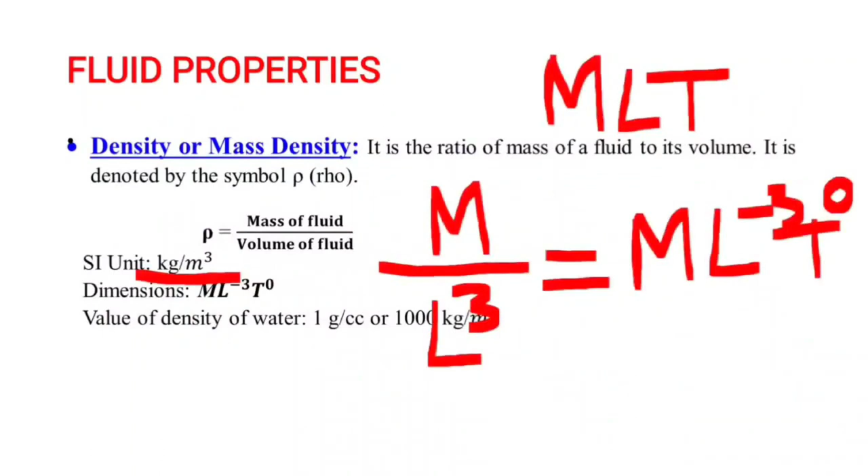So the dimensions for mass density are written as the unit kg per meter cube. Write in dimensions as M by L cube, that is equal to, in MLT form, M L power minus 3 T power 0. I hope it is understood how to write dimensions for mass density.

The value of density of water is 1 gram per cc or 1000 kg per meter cube. In numericals also, if the density of water is not given, you take 1 gram per cc or 1000 kg per meter cube.

The next fluid property is specific weight, also called weight density. It is the ratio of weight of fluid to its volume. It is denoted by the symbol gamma. Gamma equals weight of fluid by volume of fluid.

There is a relationship between weight density and mass density. Weight density equals mass density into acceleration due to gravity. If acceleration due to gravity is not given in the problem, it is 9.81 meters per second square.

SI unit for weight density is Newton per meter cube. SI unit is a derived quantity. In India, we have two systems of units - one is MKS unit, second one is CGS unit.

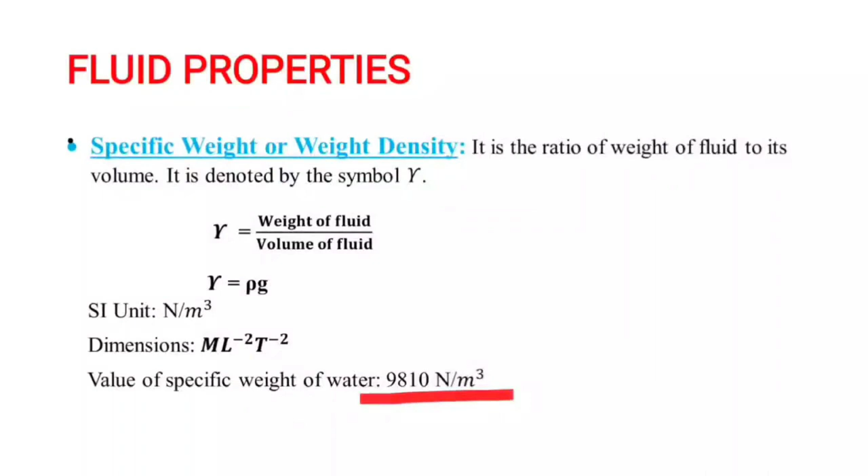The next fluid property is specific volume. It is defined as the ratio of volume of fluid to mass of a fluid. Another way of defining it is the volume of fluid occupied by a unit mass. Mathematically, specific volume equals volume of fluid by mass of fluid, which equals 1 by rho.

Specific volume is reciprocal to mass density. The unit for specific volume is a reciprocal. Rho has units of kg per meter cube, so the units for specific volume is meter cube per kg.

Dimensions: how to write and derive dimensions we saw for the two quantities, mass density and weight density. In the same manner you derive the dimensions for specific volume also. It is commonly applied for gases, not for liquids.

Specific gravity is defined as the ratio of weight density of a fluid to weight density of a standard fluid, or the ratio of density of fluid to density of standard fluid. It is also called relative density, and it is denoted by the symbol S.

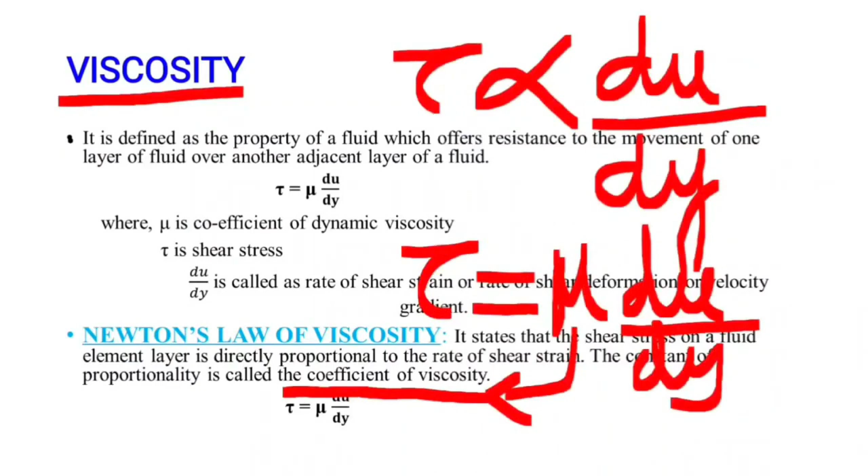Now, what are the terms? Tau is called shear stress. Du by dy is called the rate of shear strain, or rate of shear deformation, or velocity gradient. It has three names: rate of shear strain, rate of shear deformation, or velocity gradient.

The proportionality constant mu is there. Mu is called the coefficient of dynamic viscosity.

The next topic is units. See the definition of viscosity and Newton's law of viscosity. The units of viscosity, that is mu, equals tau by du by dy, which has units of Newton per meter square divided by velocity u, that is meter per second per meter. The meter gets cancelled, giving Newton second per meter square as the unit for dynamic viscosity.

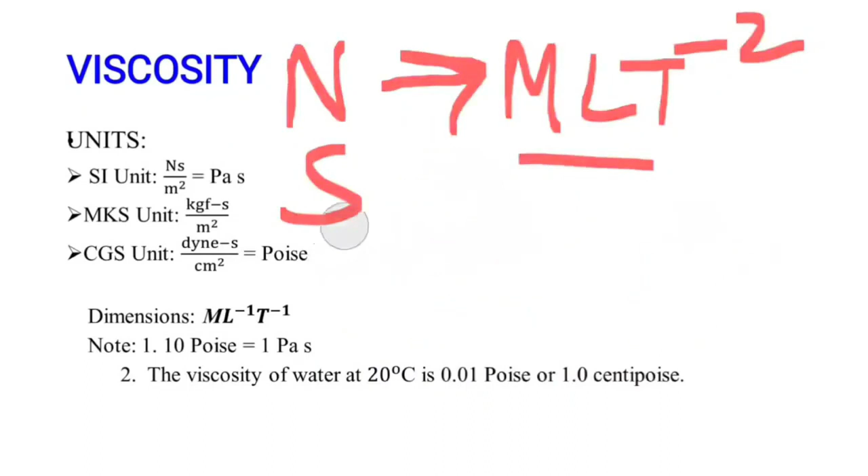It has dimensions. Newton has dimensions of MLT power minus 2. I know how to write dimensions in the previous two quantities, so I directly write the dimensions for the viscosity. N has dimensions of MLT power minus 2, S has dimensions of T, M square has dimensions of L square. So the dimensions are MLT power minus 2 into T divided by L square, that is equals to ML power minus 1 T power minus 1. It is the dimensions for viscosity.

Next one is note. That means you have to remember these points for your problems or in direct MCQs also. One poise is equals to 1 by 10 Pascal second. So 1 Pascal second is equals to 10 poise. The second point is viscosity of water at 20 degrees Celsius is 0.01 poise or 1 centipoise.

Next topic is kinematic viscosity. Kinematic viscosity is defined as the ratio between dynamic viscosity and density of fluid. Dynamic viscosity by density of fluid is called kinematic viscosity. It is denoted by the symbol nu. Mathematically, nu is equals to viscosity, that is dynamic viscosity by density of fluid. So nu is equals to mu by density, that is rho.

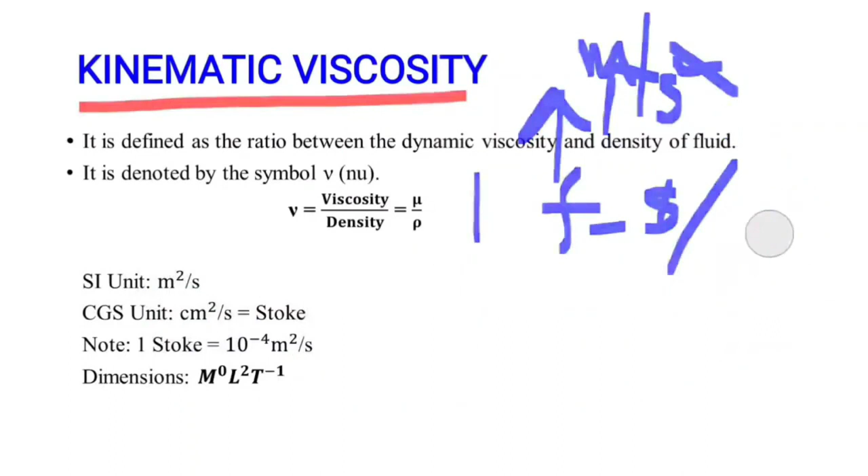The SI unit will be meter square per second. How it comes? Nu is equals to mu, Newton, that I write in SI unit as kg force second per meter square, divided by kg per meter cube. Kg get cancelled, meter square meter square get cancelled. F has units of meters per second square, so second get cancelled, that is meter square per second. This m goes here, that is meter square per second. I hope you understand. This is the SI unit or MKS unit.

The CGS unit will be centimeter square per second, that is Stoke. 1 Stoke is equal to 10 to the power of minus 4 meters square per second. Dimensions: meter square has dimensions L square, per second T power minus 1.

Next topic is variation of viscosity with temperature. Temperature affects the viscosity. Viscous forces in fluid are due to cohesive forces and molecular momentum transfer. What is meant by cohesive force? Cohesive force refers to the force of attraction between the same particles. For example, Hg, mercury. Mercury has the same molecules, has more force of attraction between them, that is cohesion. So in mercury, cohesion is more than adhesion. Adhesive forces refer to the force of attraction between two different substances, that is water and paper.

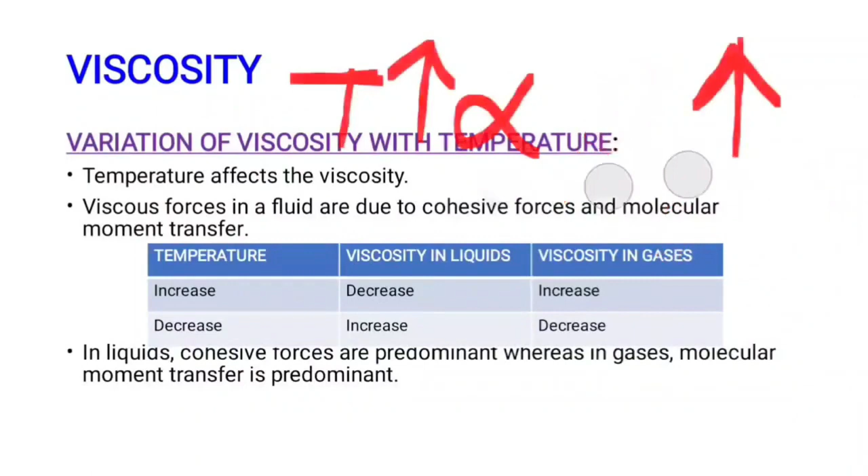The next topic is types of fluids. Ideal fluid: when is a fluid called ideal? It is incompressible and having no viscosity. No viscous means frictionless. It does not exist in real life, these are imaginary fluids. Real fluids possess viscosity, they have viscosity. All fluids in practice are called real fluids only.

Newtonian fluids: a fluid that obeys Newton's law of viscosity is called Newtonian fluid. One that does not obey Newton's law of viscosity is called non-Newtonian fluid. In other words, the same thing is discussed here: when tau is proportional to rate of shear strain, it is called Newtonian fluid. If it is not proportional, it is called non-Newtonian fluid.

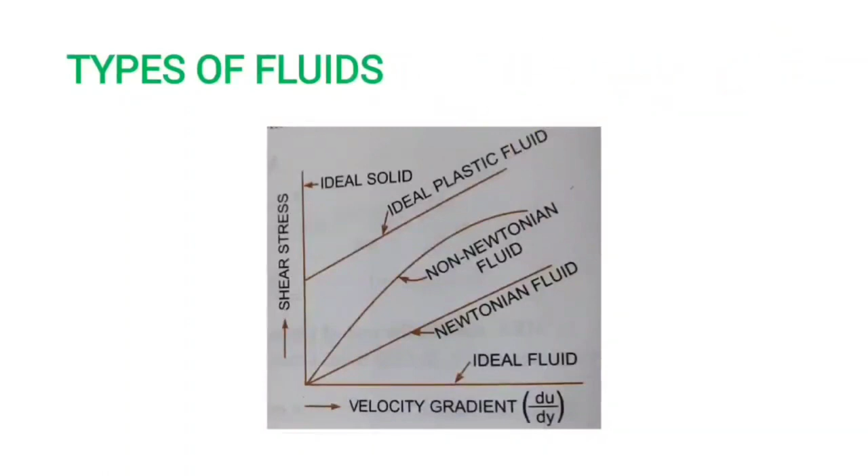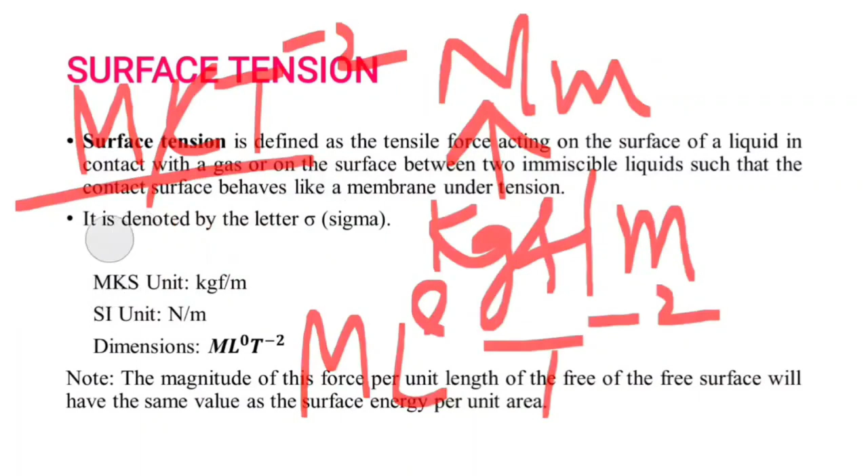Surface tension on a liquid droplet: P refers to pressure intensity inside the droplet, sigma is surface tension, D is the diameter of the droplet. P is equal to 4 sigma by D. How do we get it? By equating pressure force with the force due to surface tension. Please remember these formulas for your problems and numericals to solve.

Surface tension on a hollow bubble, like a soap bubble: both outside and inside it is in contact with air. What does the surface tension definition say? Water or air - contact between water and air, which are two immiscible liquids - forms a thin layer due to tension. So it is two times the surface tension compared to the droplet.

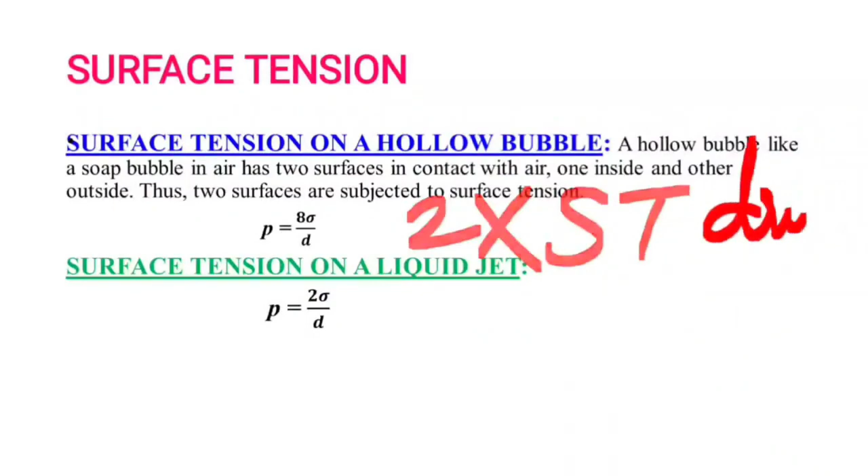Surface tension on a liquid jet: P is equal to 2 sigma by D. It is like a bar - this is L, this is D.

The next topic is capillarity. Capillarity is defined as the phenomenon of rise or fall of a liquid surface in a small tube relative to the adjacent general level of liquid when the tube is held vertically in the liquid. For example, liquid is present, and a capillary tube is inserted vertically. If the water rises in the capillary tube, it is called capillary rise. If the water held vertically in the tank, the fluid in the capillary tube falls, it is called capillary depression or capillary fall. It is expressed in terms of centimeter or millimeter of liquid. Dimensions are L only, so m power 0, L power 1.

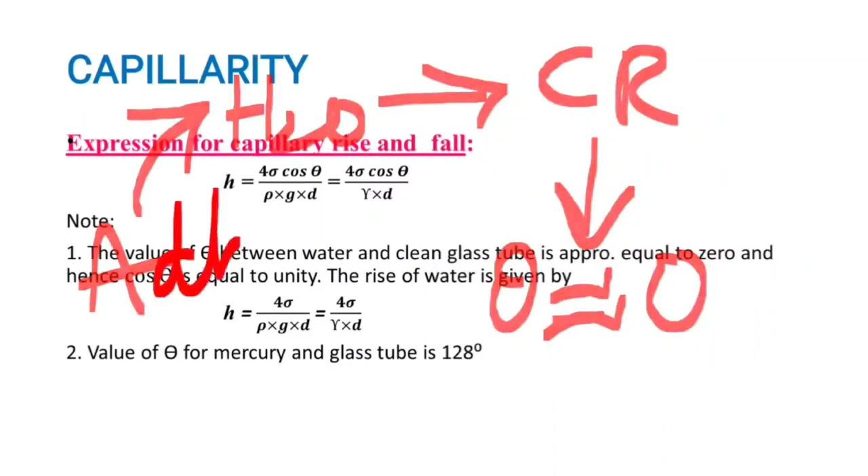Water has more adhesion. Okay, where in case of mercury...

Hg, mercury in a capillary tube, has more cohesion, so theta will be approximately 130 degrees.

This is capillary depression or capillary fall.

The next topic is vapor pressure. Consider a liquid confined in a closed vessel. Take this as a vessel. Let's say this is a vessel, closed. It is closed.

Water is present in this closed vessel. Initially the temperature is 20 degrees Celsius and the pressure is atmospheric pressure. As it is heated up, the liquid will vaporize at 100 degrees Celsius.

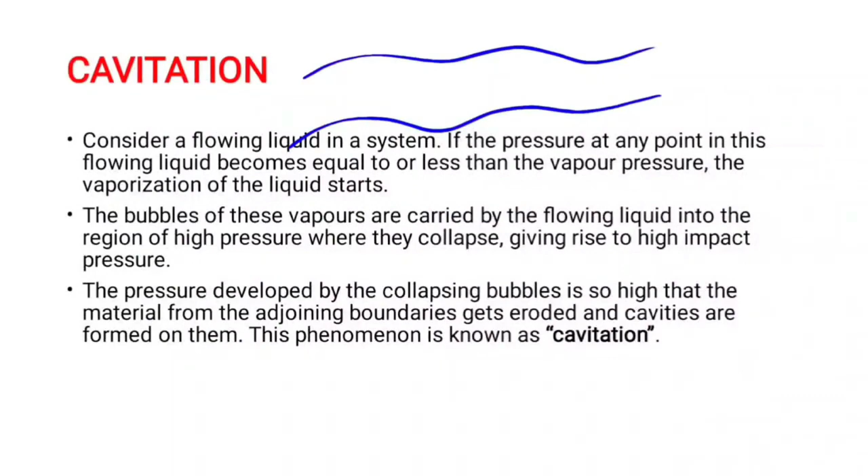Here the pressure is less than or equal to vapor pressure. The bubbles of these vapors are carried by the flowing liquid into the region of high pressure where they collapse, giving rise to high impact pressure. The pressure developed by the collapsing bubbles is so high that material from the adjoining boundaries gets eroded and cavities are formed on them. This phenomenon is known as cavitation.

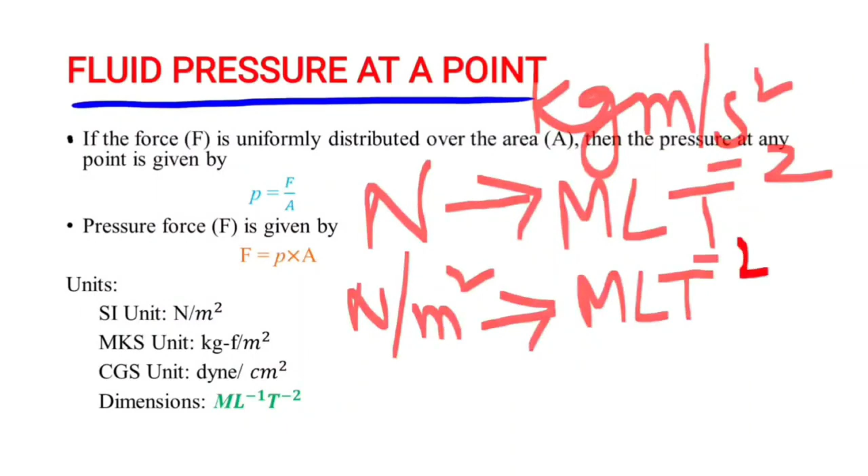The pressure has units of Newton per meter square, so ML T power minus 2 divided by L square, that is ML power minus 1 T power minus 2, is the dimension of pressure.

Next is Pascal's law. Pascal's law states that pressure at a point in a static fluid, meaning the fluid is at rest condition, is equal in all directions - in x direction, in y direction, in z direction, the pressure is equal: Px equals Py equals Pz. That is Pascal's law.

The next one is hydrostatic law. The pressure at any point in a fluid at rest is obtained by the hydrostatic law. It states that the rate of increase of pressure in a vertically downward direction must be equal to the specific weight of the fluid at that point.

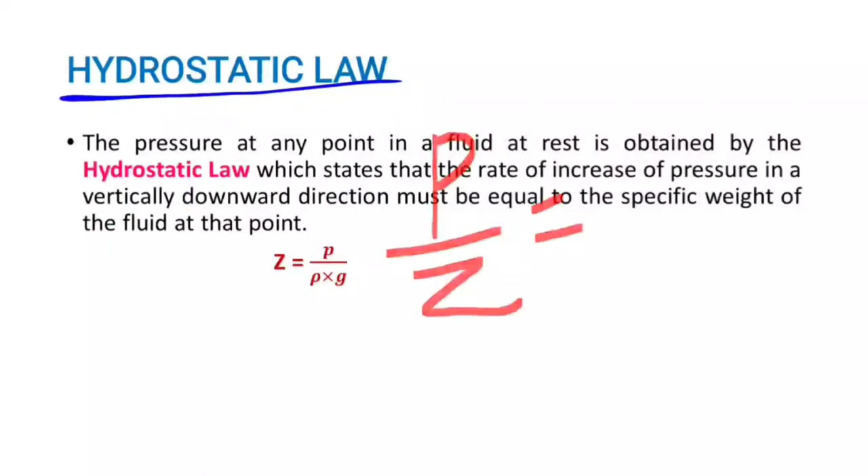dP by dz is equals to gamma. Gamma is equals to rho g. If you integrate this, dP becomes P and dz becomes z, that is equals to rho g. So P by z is equals to rho g, and z is equals to P by rho g. This z is called pressure head.

Pressure head. The next topic is absolute, gauge, atmospheric and vacuum pressure. How are these defined? We have two systems: in one, absolute zero or completely vacuum pressure is taken as datum; in another, atmospheric pressure is taken as datum.

Absolute pressure: here we take absolute vacuum pressure as reference and calculate the pressure, which is called absolute pressure. Gauge pressure: here we take atmospheric pressure as datum and measure pressure, which is called gauge pressure.

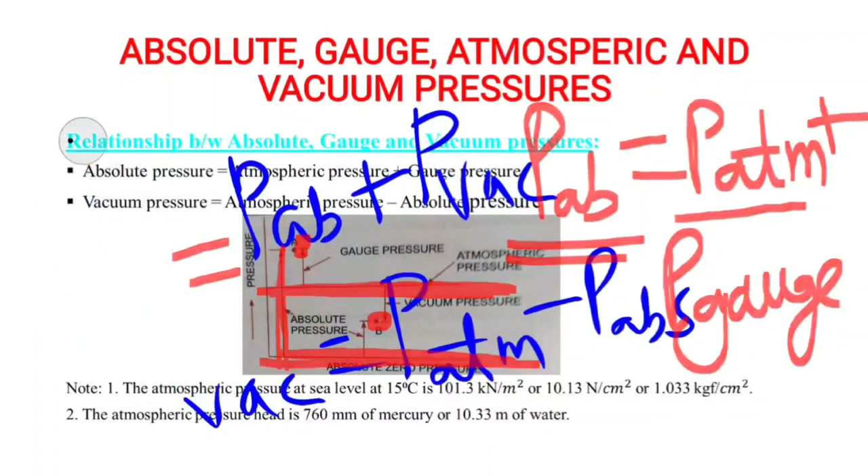Some important points to remember: first, atmospheric pressure at sea level at 15 degrees centigrade is 101.3 kilonewton per meter square, 10.13 newton per centimeter square, or 1.033 kgf per centimeter square. Generally this value of 1 atmospheric is equals to 1 atm.

What is atmospheric pressure equal to? 101325 Pascal, that is Newton per meter square. This Pascal is converted into kilonewton per meter square, Newton per centimeter square, and kgf per centimeter square. This is the first point.

Second point: atmospheric pressure head in terms of mercury is 760 mm, and in terms of water is 10.33 meters. The next topic is measurement of pressure.

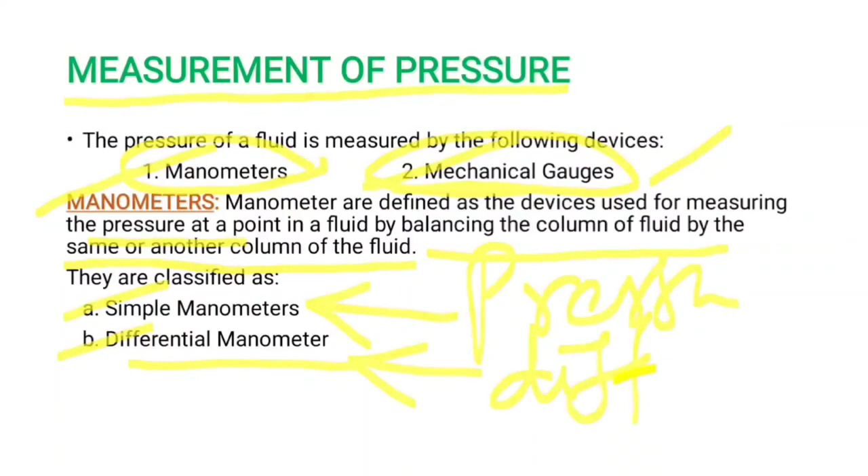Simple manometers consist of a glass tube. One end is connected to a point where pressure is to be measured. I need to measure pressure at this point, so I connect a glass tube to that point, and the remaining end is open to atmosphere. This is a simple diagram for that.

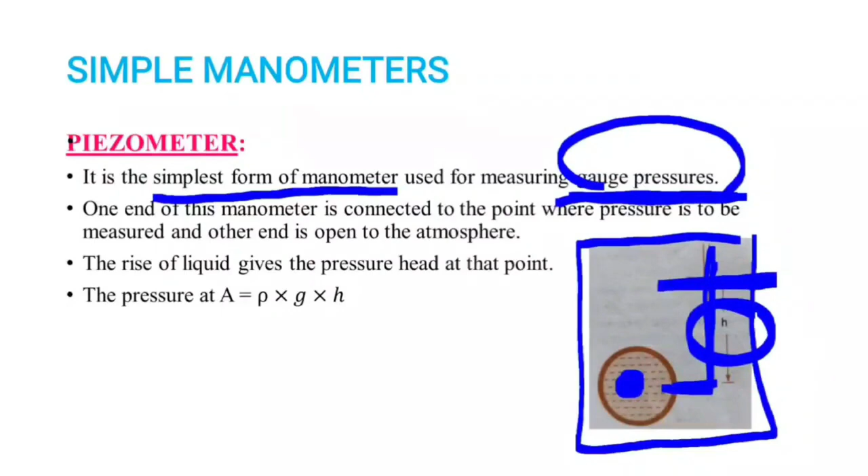Z is equals to P by rho g. So P is equals to rho g z. Here z becomes h, so the formula becomes rho g into h.

The next one is U-tube manometer. It consists of a glass tube bent in U shape.

One end of the tube is connected to a point at which pressure is to be measured, and the other end is kept open to the atmosphere.

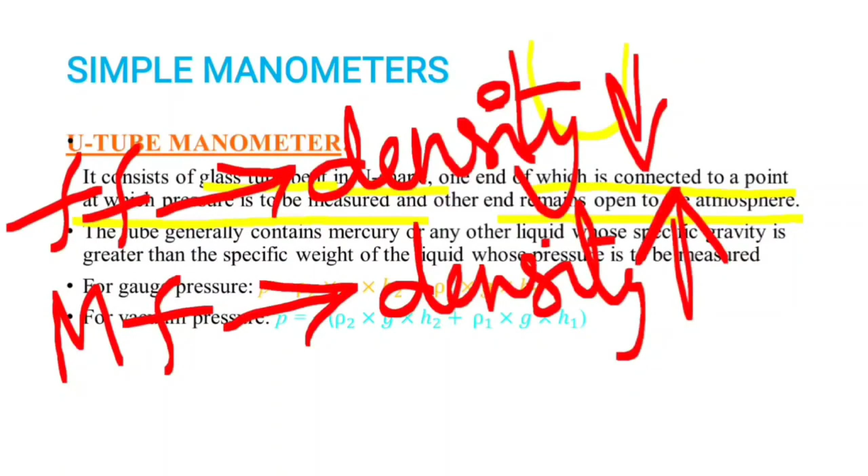Here we find gauge pressures as well as vacuum pressures. This represents atmospheric pressure. Based on this atmospheric pressure as datum, I use it to measure vacuum pressure (P vacuum) in the downward direction, and in the upward direction it is called P gauge.

These figures represent: the first one is for gauge pressure, the second one is for vacuum pressure. The flowing fluid, like water or oil, is at this position, and this is for the manometric fluid. I take this line AA as the datum.

How to measure pressure in U-tube manometer? First let us see how to find the equation for gauge pressure. H1 is the height of flowing fluid, and H2 is the height of manometric fluid, based on the datum line.

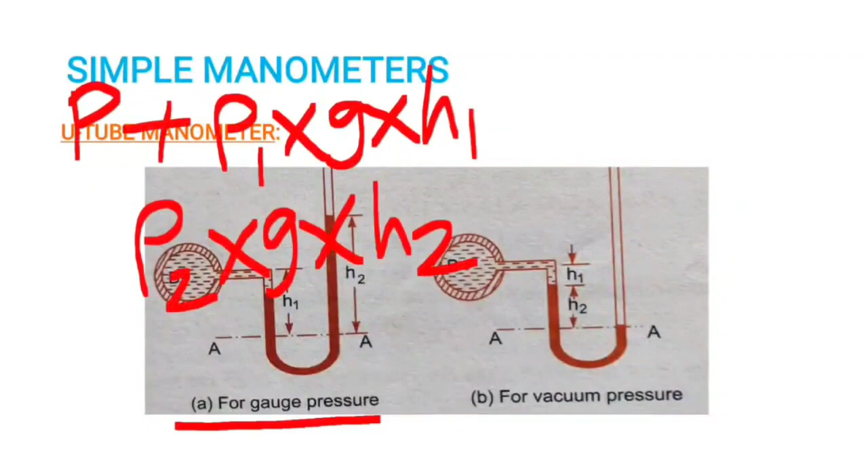So taking rho2*G*H2, P equals rho2*G*H2 minus rho1*G*H1. Simple. I hope this is understood by everyone.

Next, how to find pressure for the vacuum pressure case. Let's see how to find this. In the vacuum pressure case, the flowing fluid height is less, and the manometric fluid height here is more.

Consider line AA as datum. Here atmospheric pressure is 0. On the right side it is 0, on the left side we have P, so P plus H1 for the height of flowing fluid gives rho1*G*H1, plus rho2*G*H2. Equating left side to right side which is 0, P equals minus of rho1*G*H1 plus rho2*G*H2. This is the equation for vacuum pressure in the case of U-tube manometer.

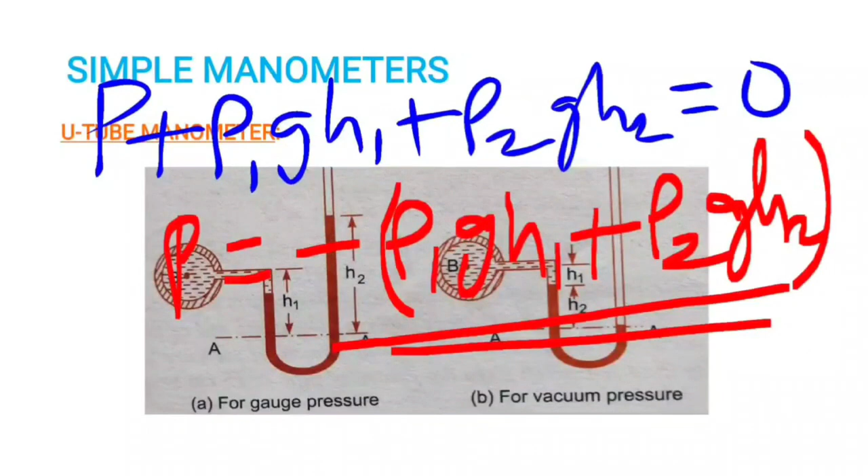The next one is differential manometer. Differential manometers are devices used for measuring the difference of pressures between two points or in two different pipes. Here we find out the difference of pressure. A differential manometer consists of a U-tube containing a heavy liquid, whose two ends are connected to the points whose difference of pressure is to be measured.

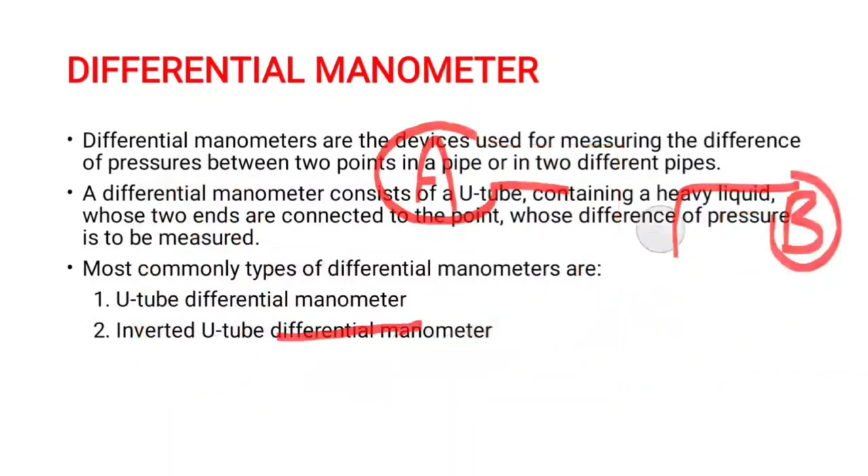U-tube differential manometer has two cases. First, A and B are at different levels and contain different liquids, also containing liquid of different specific gravity. In differential manometers, what you have to find is the difference in pressures, PA minus PB. Let me show you how this equation is derived.

First I take the left hand limb - this part is the reference. Here pressure at A is PA, so PA plus this height x plus h, gives rho1*g*x plus rho1*g*h. This is the left hand side. The right hand side will be PB plus...

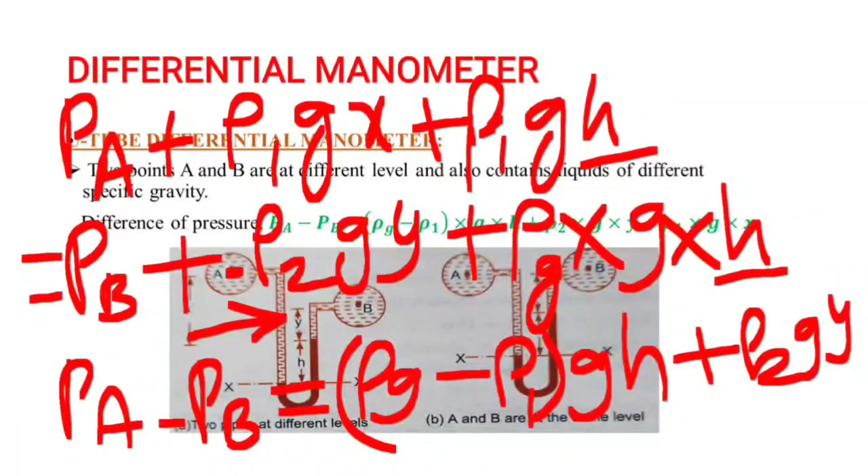...rho2*g*y plus rho_g (heavy fluid density) into g into h. Equating these two, PA minus PB equals, since gh is common in this term, (rho_g minus rho1)*g*h plus rho2*g*y minus rho1*g*x. This is the equation - you can see it here.

Here, PA minus PB is equal to rho g minus rho 1 times g into h, plus rho 2 into g into y, minus rho 1 into g into x.

The next case is two points A and B at the same level, containing the same liquid, that is, the density is same. We find the difference in pressure. This is the second case, and this is the second case diagram. Take this as reference.

So PA plus... A plus x plus h, right? So rho 1 g x plus rho 1 g h, this is the left hand limb. And the right hand limb is PB plus rho 1 g x plus rho g h. Equating these two, terms are cancelled, and PA minus PB is equal to rho g minus rho 1 into g into h. This is the equation we got.

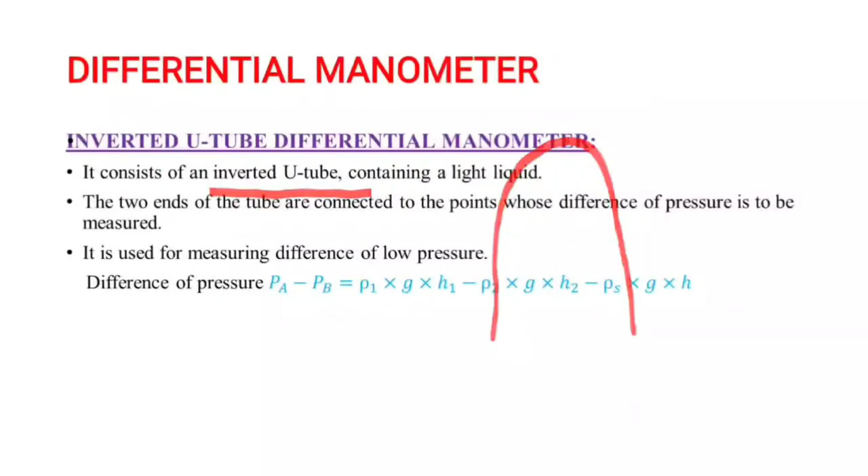The next is inverted U-tube differential manometer. It consists of an inverted U-tube containing a light liquid. Light liquid means the manometric fluid is lighter than the flowing fluid. The two ends of the tube are connected to a point whose difference of pressure is to be measured. It is used for measuring difference of low pressure.

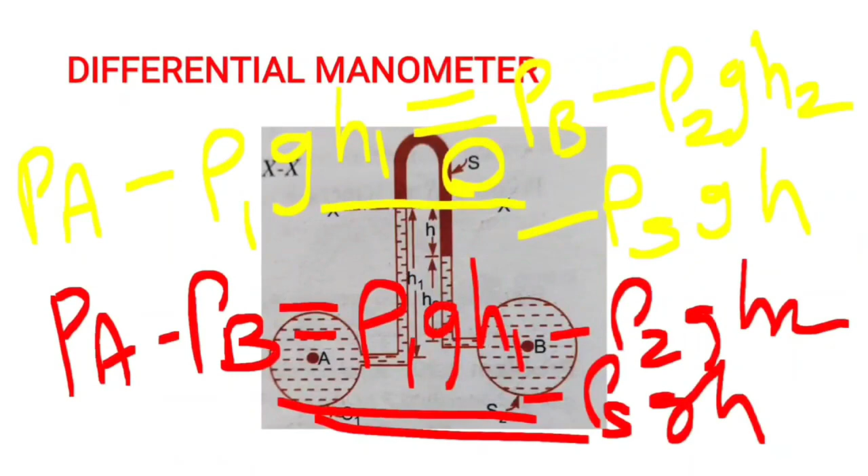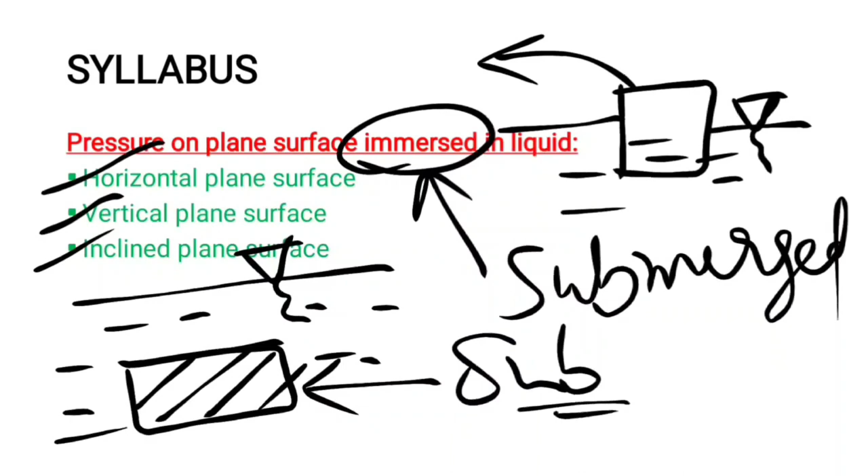First we will see what total pressure is, and what center of pressure is. It is defined as, total pressure is defined as a force — it's a force, not pressure. Total pressure is a force exerted by a static fluid, meaning the fluid is at rest, on a surface, either plane or curved, when the fluid comes in contact with the surface. This is the surface of the liquid, this is liquid, this is liquid.

A vertically submerged body — I take a vertical plane surface submerged in liquid. The water comes in contact with the surface, and a force is exerted on the surface. That force acts normal to the surface. This is the surface, the force acts normal to the surface. This is pressure force, acting normal to the surface. The point of application of the total pressure force on the surface is called the center of pressure.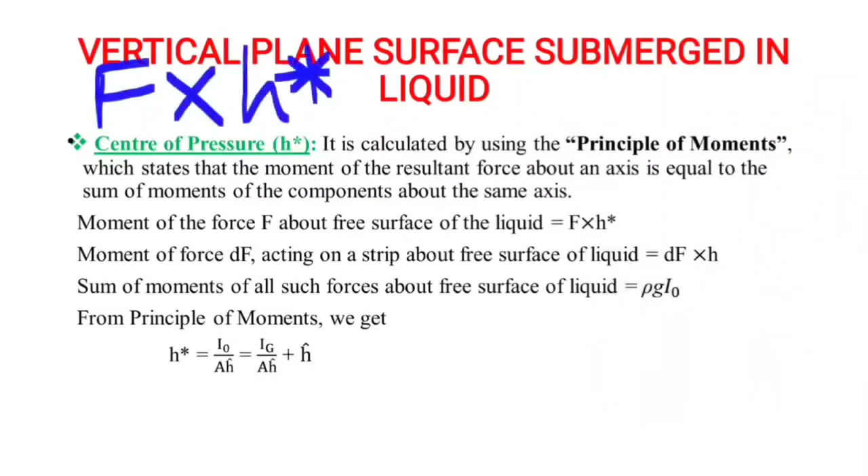So the moment due to resultant force will be F into H star, for this strip, dF into H. I integrate all and sum, I get rho g I naught.

From this, H star is equal to rho g I naught divided by F. F is nothing but rho g A H bar. Rho g gets cancelled, so H star is equal to I naught by A H bar.

From the parallel axis theorem, I naught is equal to Ig plus A H bar squared. Substitute I naught in this equation, we get H star is equal to Ig by A H bar plus H bar.

This is the equation for center of pressure distance.

The next point to remember is that the center of pressure lies below the center of gravity of the vertical surface. This is the center of gravity, and this is the center of pressure. H star is equal to Ig by A H bar plus H bar. H star equals H bar plus, this is the free surface, this is H bar, this is plus Ig by AH, this distance. So Cp is below the Cg, center of pressure is below the center of gravity.

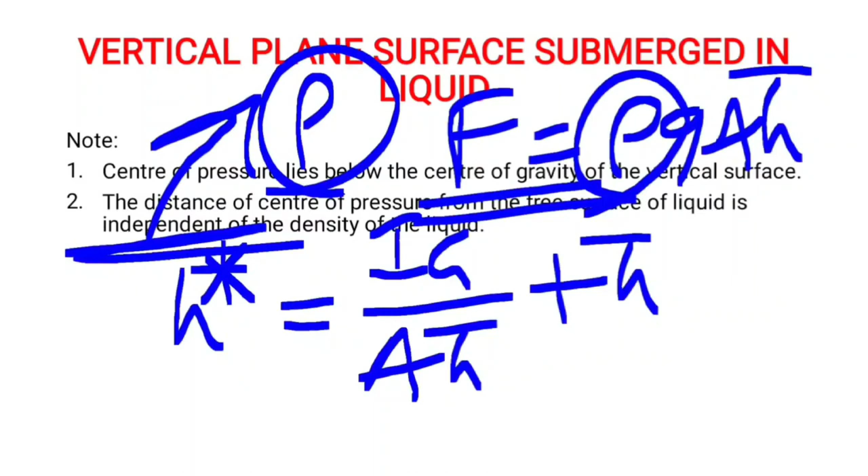The equation is Ig by A H bar plus H bar. In this term, we don't have rho, so it is independent of density. But the pressure force is rho g A H bar, so F is dependent on the density of the liquid.

The next one is to give some important plane surfaces - rectangle, triangle, circle, trapezoid - and their moment of inertia, that means MI.

First, rectangle: CG from the base is d by 2, area is BD, moment of inertia about center of gravity or centroid is BD cube by 12, and from the base it is BD cube by 3.

For triangle, CG from the base is x equal to h by 3, and the area is half into BH. The moment of inertia will be BH cube by 36, and about the base it is BH cube by 12.

Next, the plane surface is circle. It has CG from the base at d by 2, the area is pi by 4 d square, and the moment of inertia about the centroid is pi d power 4 by 64.

For the trapezium, x is equal to 2a plus b by a plus b into h by 3, where a is top width and b is bottom width of the trapezium. This is the centroidal distance from the base. Area is a plus b by 2 into h, and the moment of inertia is a square plus 4ab plus b square by 36 into a plus b into h cube, about the centroid.

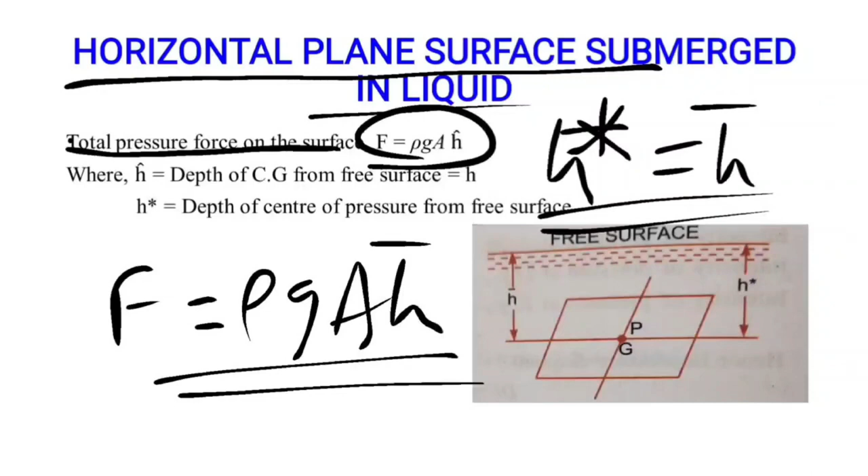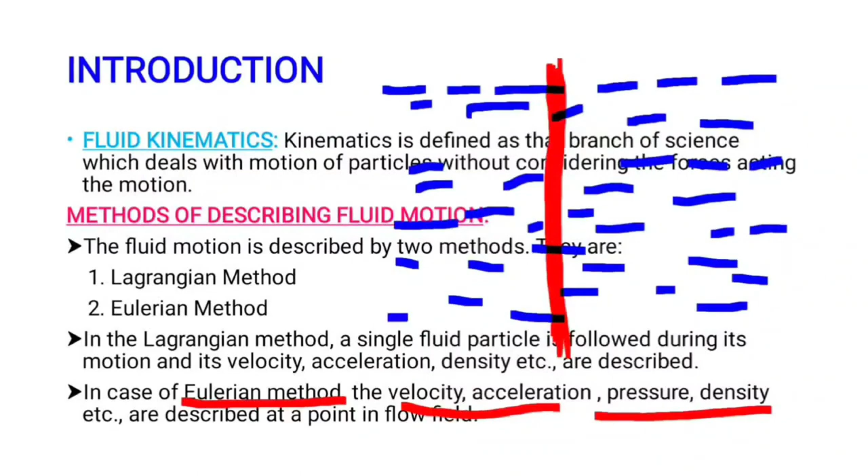Next, fluid flow is classified as follows: steady and unsteady flows, uniform and non-uniform flows, laminar and turbulent flows, compressible and incompressible flows, rotational and irrotational flows, and 1, 2 and 3 dimensional flows. In our syllabus, the first three flows - steady and unsteady, uniform and non-uniform, laminar and turbulent flow - are included. Compressible, incompressible, rotational, irrotational, and 1, 2, 3 dimensional flows are not in our syllabus.

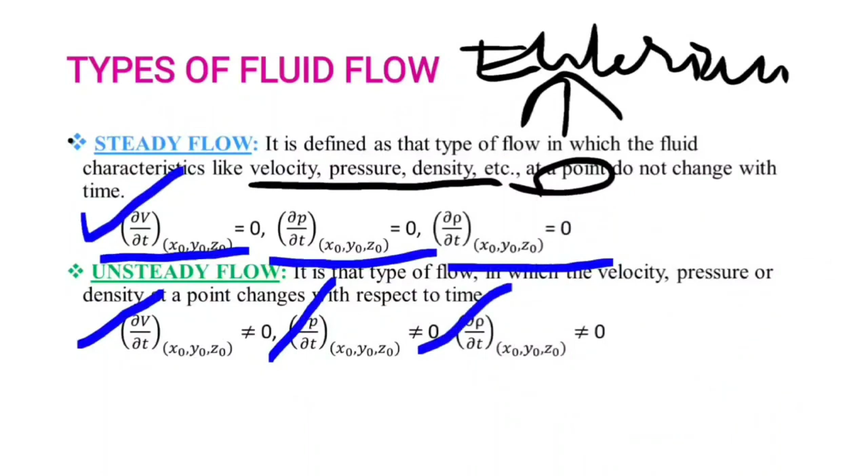The next one is uniform flow. It is defined as the type of flow in which the velocity at any given time, meaning time is constant, does not change with respect to space.

That space refers to the length in the direction of flow. Let's say this is the flow, this is the direction of flow. We consider the length direction. In that direction the velocity did not change, that means it did not alter. That is called uniform flow.

In non-uniform flow, the velocity at a given time changes with respect to space. I hope that is also clear.

The next type is laminar flow. It is defined as the type of flow in which the fluid particles move along well-defined paths or streamlines. All streamlines are straight enough, and those are all parallel to each other.

Thus particles move in laminas. Laminar flow gets its name because the particles move in laminas. Laminas means layers gliding smoothly over the adjacent layer.

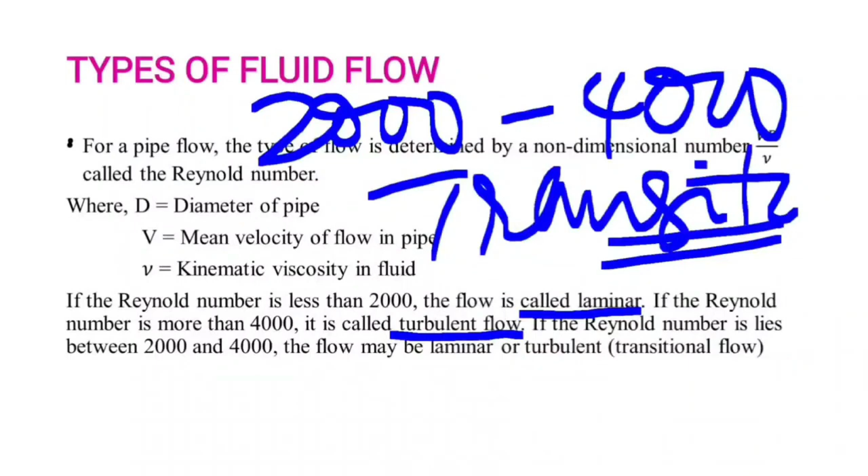Whether it is laminar or turbulent, it is a transition in between laminar and turbulent, so it is called transitional flow. The next one is,

here our syllabus is over. This is the extra part.

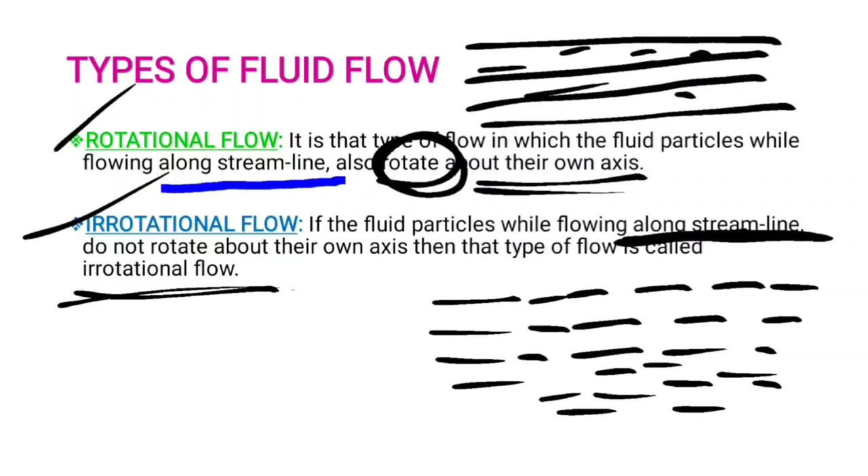For APPSC exam, the syllabus under fluid dynamics is: energies in fluid motion - datum head, pressure head and velocity head; total energy of a fluid in motion, that is Bernoulli's theorem; practical applications of Bernoulli's theorem including pitot tube, venturi meter and orifice meter.

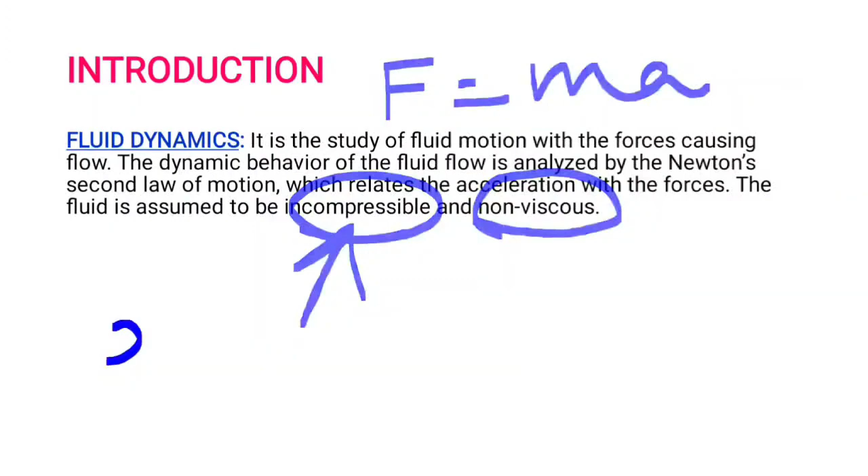First, what is meant by fluid dynamics? It is the study of fluid motion with the forces causing flow. In another way of defining it, it is the study of fluid in motion considering the pressure forces. The dynamic behavior of a fluid flow is analyzed by Newton's second law of motion, that is F equals ma, which relates acceleration with forces. The fluid is assumed to be incompressible and inviscid. Incompressible means the density is constant, and non-viscous means the viscosity is zero, that means frictionless.

Next, the total energy of a fluid in motion, that is Bernoulli's theorem. The statement of Bernoulli's theorem is: it states that in a steady ideal flow of an incompressible fluid, the total energy at any point of the fluid is constant. The total energy consists of pressure head, kinetic head and potential head or datum head.

First we see what is meant by steady ideal flow. Steady flow means the flow characteristics such as velocity, pressure and density with respect to time at any point are not changing. Mathematically, we write dv by dt at a point x, y, z equals to 0. This is called steady flow. Ideal flow refers to viscosity being 0, that is frictionless. Incompressible fluid means the density is constant.

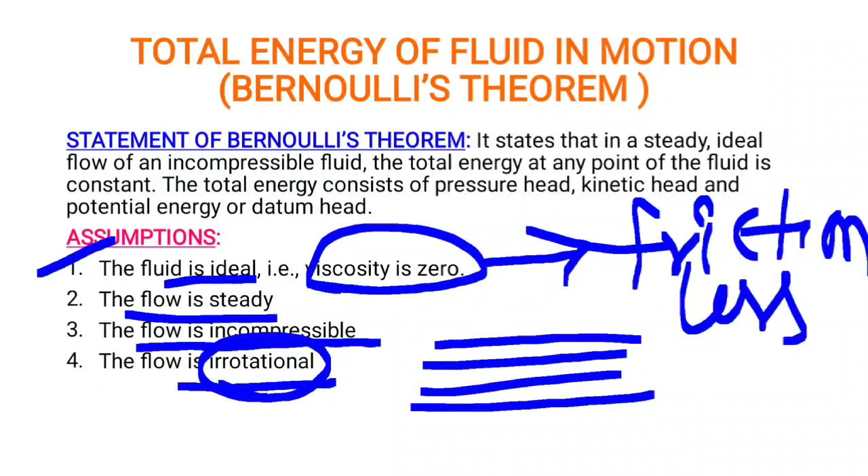And Bernoulli's equation is obtained from Euler's law by integrating the Euler's equation. By integrating dp by rho, we get p by rho plus gz, plus v dv, that is v square by 2.

ఓకే, నేను సింప్లిఫై చేయడం కోసం జీతో అన్నిటినీ డివైడ్ చేశాను. So p by rho g plus z plus v square by 2g - this is the formula for Bernoulli's equation. That is p by rho g plus z plus v square by 2g equals to constant is the Bernoulli's equation. P by rho g plus z is called the piezometric head.

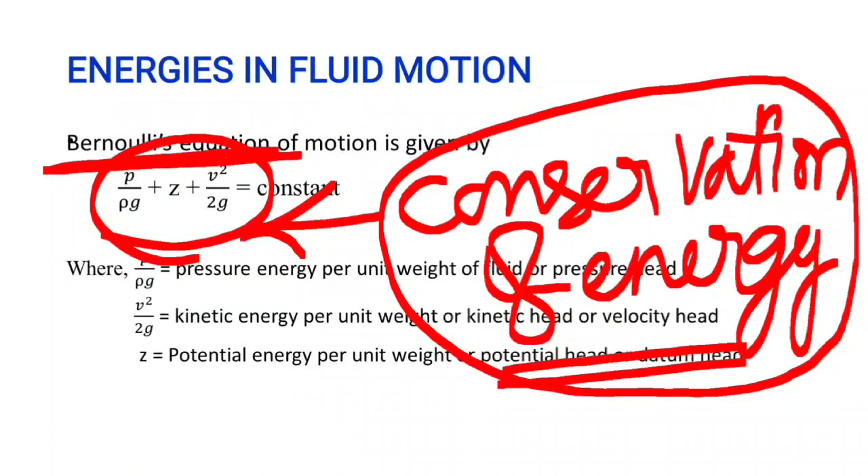Next one is Bernoulli's equation for real fluid. The Bernoulli's equation was derived on the assumption that the fluid is inviscid, that is non-viscous.

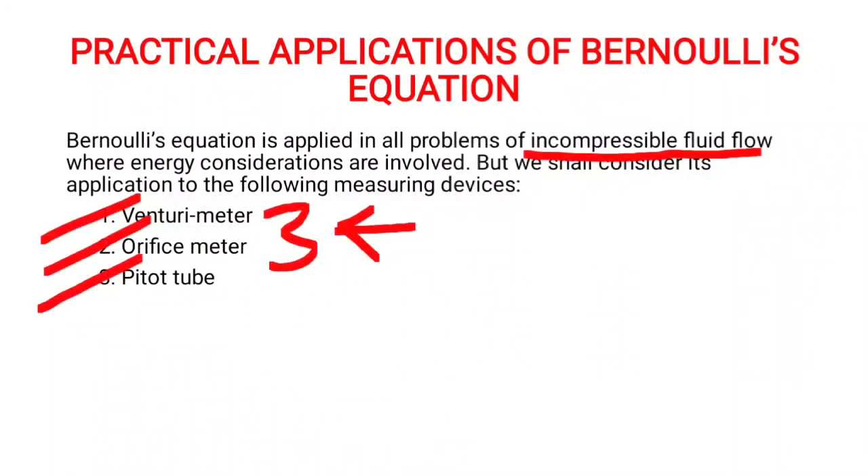There are three measuring devices, namely venturi meter, orifice meter, and pitot tube, which are the practical applications of Bernoulli's equation. These are based on the Bernoulli's equation, and they work based on the Bernoulli's equation. Venturi meter and orifice meter are used to measure the rate of flow, that is discharge, and the pitot tube is used to measure the velocity.

It is based on the principle of Bernoulli's equation. The next one is venturi meter. We don't need any derivations, but we need only the formula for the problems. We remember this formula. Based on the Bernoulli's theorem only, these rate of flow equations are derived. If you have any doubt, please refer to the RK Bansal textbook.

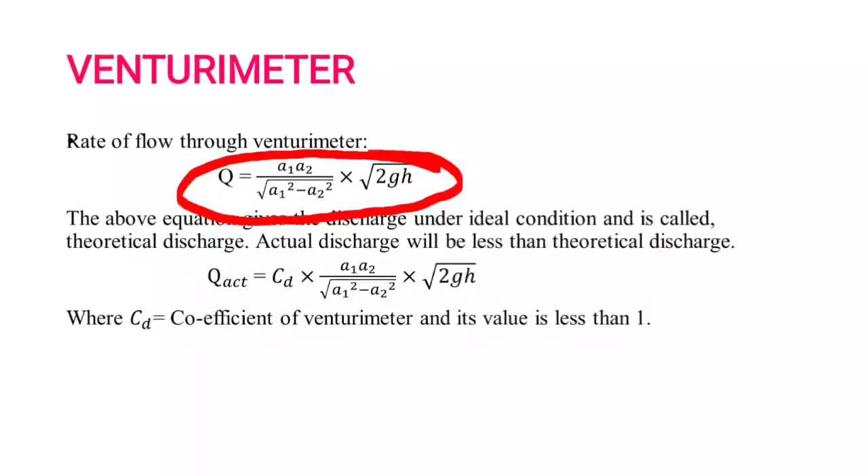Rate of flow through venturi meter. This is the venturi meter. Q is equals to A1 A2 by square root of A1 square minus A2 square into under root 2gH. It is the rate of flow. This is the theoretical one. If you calculate the actual, you multiply the theoretical rate of flow with the coefficient of discharge.

Coefficient of discharge. If you calculate for real fluids, we calculate head loss, right? The head loss is equals to, for the venturi meter, 1 minus CD square into H. This is the formula for head loss for venturi meter. The coefficient of venturi meter, its value is less than 1.

Next, the value of H. This is the H value, right? For determining the H value, we have 4 ways. By using a differential U-tube manometer.

Let the differential manometer contain the liquid which is heavier than the flowing liquid. That is, the manometric fluid is heavier than the flowing liquid. Then the H value is determined: H is equals to X into specific gravity of heavier fluid by specific gravity of flowing fluid minus 1. This is the formula to determine the H value in case the manometric fluid is denser than the flowing fluid.

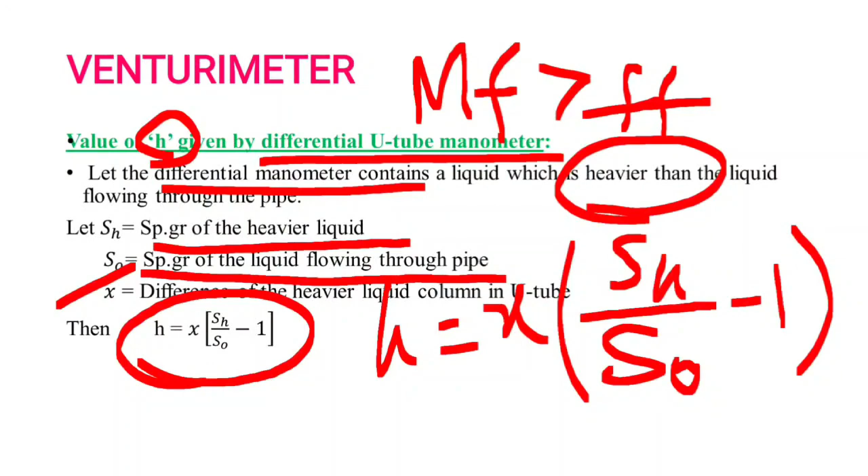The next case is if the differential manometer contains a liquid which is lighter than the liquid flowing through the pipe, that is the density of the manometric fluid is less than the flowing fluid. The formula for H is given by H equals X into 1 minus SL by S0. SL refers to the specific gravity of the manometric fluid, that is the lighter liquid.

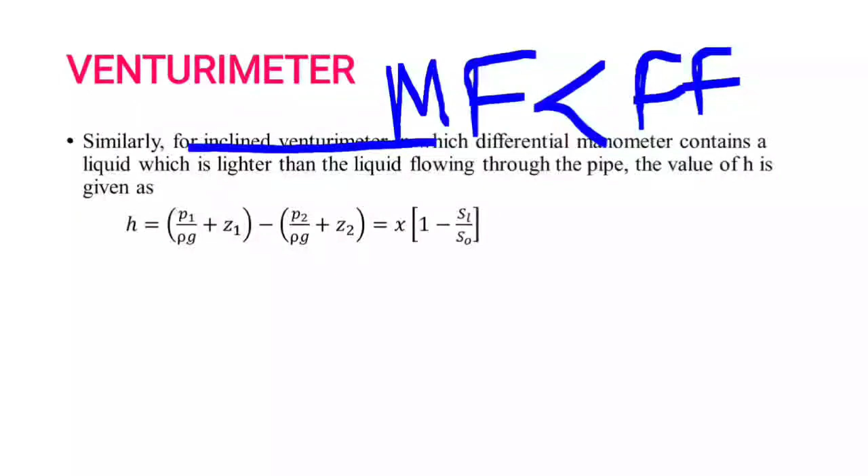Based on the heads also we can find, and based on the specific gravities also we can find the h value. The formula is: p1 by rho g plus z1 minus p2 by rho g plus z2, that equals X into 1 minus SL by S naught. This is the specific gravity of the manometric fluid, that is lighter. S naught is the flowing fluid. I hope up to this point it is clear.

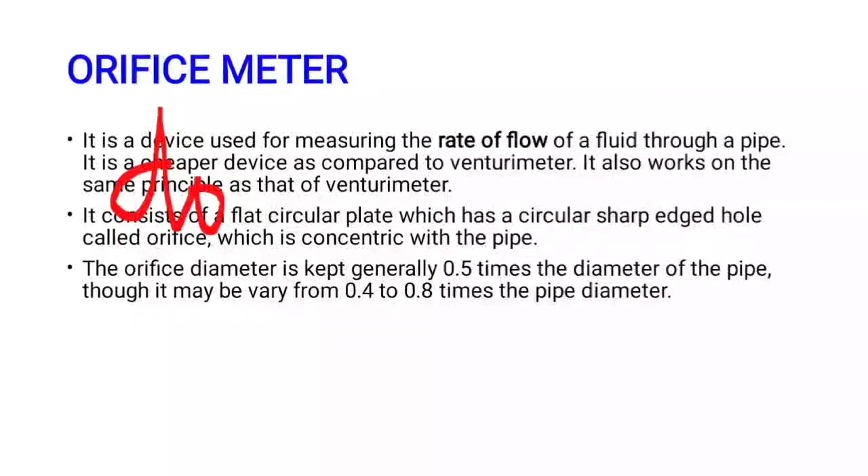The orifice diameter is generally kept 0.5 times the diameter of the pipe, generally varying from 0.4 to 0.8 times the pipe diameter. So, diameter of orifice DO equals 0.4 to 0.8 times the diameter of the pipe. Generally we adopt 0.5 times the diameter of the pipe.

This is the orifice meter, let's say this is the figure of the orifice meter. This is the direction of the flow. This is the orifice meter. If you measure the h value, you put a differential manometer.

The discharge equation will be Q equals A naught Cc under root 2gh. Why? Because here the flow is contracted, so we consider the coefficient of contraction Cc value. What is meant by Cc? We can study this in the next chapter, next topic. This is the general formula, but Cc is not known to us.

We get a relationship between CD and CC and put the CC value in the above equation. We get Q as CD into A naught A1 under root 2gh, divided by under root of A1 square minus A naught square. This is the discharge equation for the orifice meter. CD is the coefficient of discharge for the orifice meter. The coefficient of discharge for the orifice meter is much smaller than that of the Venturi meter.

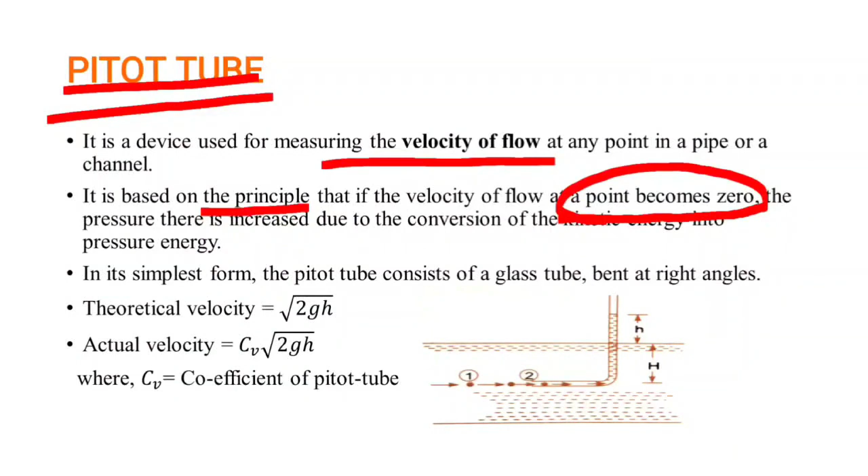In its simple form, the pitot tube consists of a glass tube bent at 90 degrees with the horizontal. The theoretical velocity is root 2gh, and the actual velocity is Cv into root 2gh, where Cv is the coefficient of the pitot tube, which is actually the coefficient of velocity.

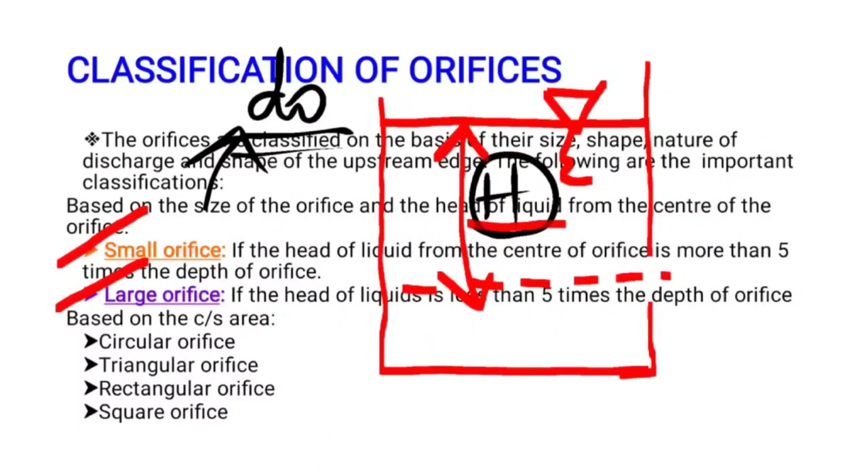If the head of liquid is greater than 5 times the depth of orifice, it is called a small orifice. If H is less than 5 times the depth of the orifice, it is called a large orifice.

The next classification is based on the cross sectional area, which refers to the shape of the orifice. If the orifice is circular, it is called a circular orifice. If it is triangle in shape, it is called a triangular orifice. If it is rectangular in shape, it is called a rectangular orifice. If it is square, it is called a square orifice.

The next classification is based on the shape of the upstream edge of the orifice: sharp edged orifice and bell mouthed orifice. The next classification is based on the nature of the discharge: free discharging orifice, and drowned or submerged orifice. This drowned or submerged orifice is again classified into two types: fully submerged and partially submerged orifices.

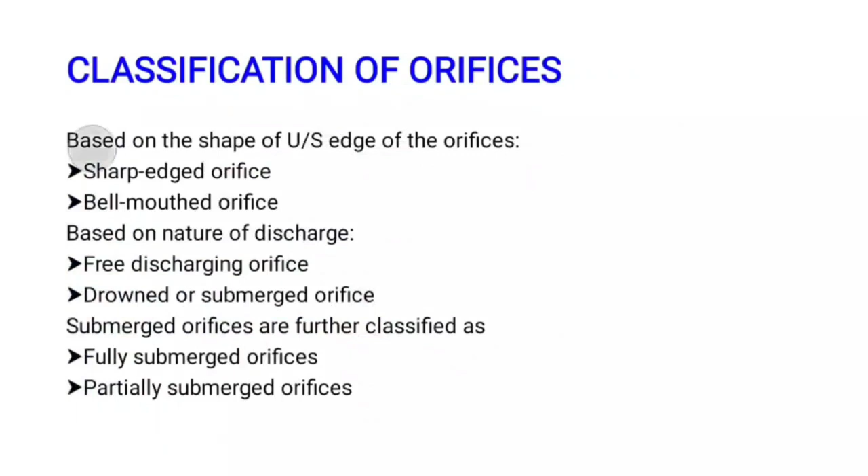Let's see the difference between sharp edged orifice and bell mouthed orifice. I'll draw a rough sketch for better understanding - a sharp edged orifice and a bell mouthed orifice. This is a tank, which has some thickness. The edge is like this, sharp - it is called a sharp edged orifice. If the orifice is like the bell mouth, this is the bell mouth shape - it is called a bell mouthed orifice. I hope the classification is clear.

Next, vena contracta. Consider a tank fitted with a circular orifice on one of its sides. Let's say this is the tank with a circular orifice fixed at one side, and H is the head of water. The liquid flowing through the orifice forms a jet whose area of cross section is less than the area of the orifice. This is the orifice, and this is the jet. The diameter of the jet is less than the diameter of the orifice, meaning the area of the jet is less than the area of the orifice.

As the jet flows, its area goes on decreasing, and at a section CC the area is minimum. If you write the continuity equation, Q equals AV, A is inversely proportional to the velocity. Since A is minimum, the velocity will be maximum. At the vena contracta, the area is minimum and the velocity is maximum.

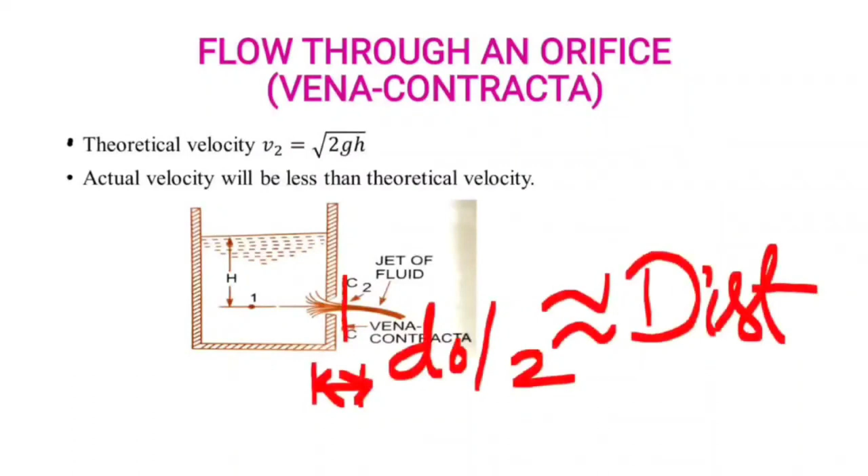In that section, the streamlines are straight enough and parallel to each other, and perpendicular to the plane of the orifice. This is the plane of the orifice, and these lines parallel to each other are the streamlines, perpendicular to the plane of the orifice. That section is called the vena contracta - this section CC is called vena contracta.

Beyond this section, the jet diverges and is attracted downward by gravity. After this section, the jet falls down due to gravity action. For this, the theoretical velocity will be root of 2gh. The actual velocity equals some constant into theoretical velocity. That's why the actual velocity is always less than the theoretical velocity - because the constant Cv, called the coefficient of velocity, is less than 1, so the actual velocity is always less than the theoretical velocity. I hope it is clear.

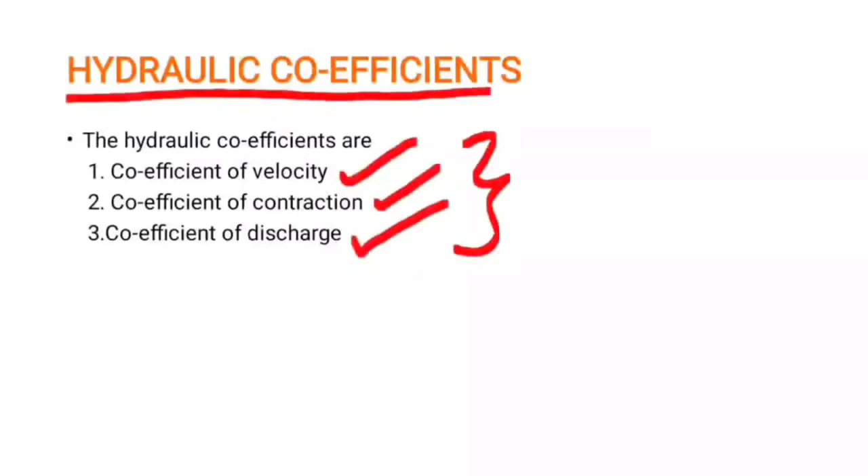Next we move to the hydraulic coefficients. Coefficient of velocity, coefficient of contraction, and coefficient of discharge are combinedly called hydraulic coefficients. First we see coefficient of velocity. What is meant by coefficient of velocity? Coefficient of velocity is the ratio of actual velocity to theoretical velocity - actual velocity represented by v, and theoretical velocity, the formula is root of 2gh.

This is based on a formula. If I conducted an experiment in the laboratory, this is the tank, and this is the orifice. The jet looks like this.

I consider a point here. From this orifice to this point, it is x, and from this the point is located in the y direction. Then CV is given by x divided by the square root of 4yh.

H is the head, the head of the liquid. So x by the square root of 4yh is also a formula for the coefficient of velocity.

Generally, the coefficient of velocity for different orifices varies from 0.95 to 0.99 based on the size, shape and head of the liquid.

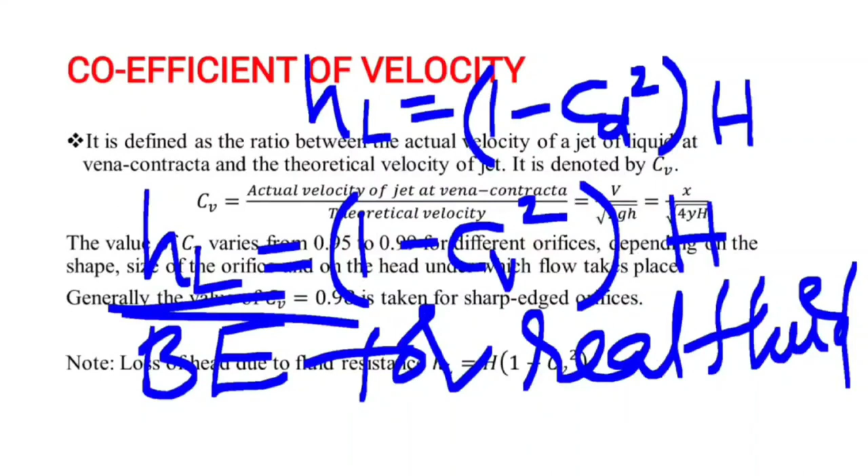The next one is coefficient of contraction. It is the ratio of the area of the jet at vena contracta to the area of the orifice.

It is denoted by the letter CC. The value varies from 0.61 to 0.69 depending on the shape, size and head of the liquid. Generally, the CC value is taken as 0.64.

The next hydraulic coefficient is coefficient of discharge. This is the ratio of actual discharge by theoretical discharge.

If the continuity equation is applicable, A into V actual by A of orifice into V theoretical. If we write this as CC into actual velocity by theoretical velocity, you can write it as CV.

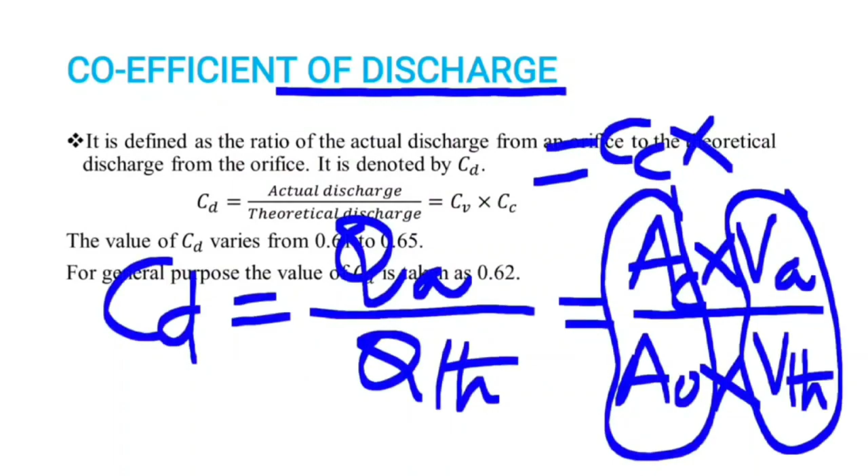So CD is equal to CC into CV. It is the relation between CC, CD and CV.

Generally, the CD value varies from 0.61 to 0.65. For general purposes we take 0.62 as the CD value.

The next concept is flow through large orifices. When the head of the liquid is less than 5 times the depth of the orifice, it is called a large orifice.

In case of small orifice, the velocity in the entire cross section of the jet is considered to be constant.

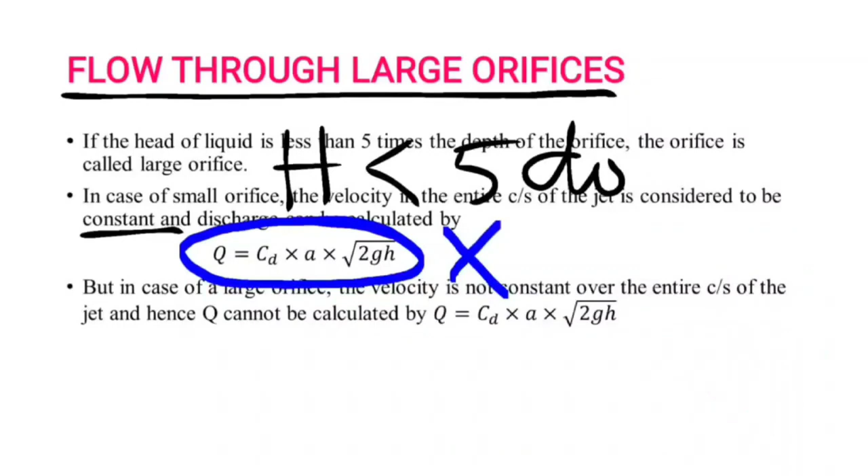But in case of a large orifice, this formula is not at all applicable because the velocity is not constant here. That's why we go with another formula.

So, discharge through a large rectangular orifice. How it is done, the derivation part, is not important. We just need to remember the formula, that's enough.

Okay, the dimensions are b into dh. The strip is at depth h. Considering this strip, the area will be b into dh.

Then the theoretical velocity will be the square root of 2gh. Generally, you have Q equals CD into area into velocity, this is the general formula.

So this is CD, the area of the strip will be b into dh, and the velocity will be the theoretical velocity, the square root of 2gh. This is the discharge for the elementary strip.

If I need the whole element, I integrate this and get Q as two-thirds of CD into b, into the square root of 2g, times h2 to the power three by two minus h1 to the power three by two.

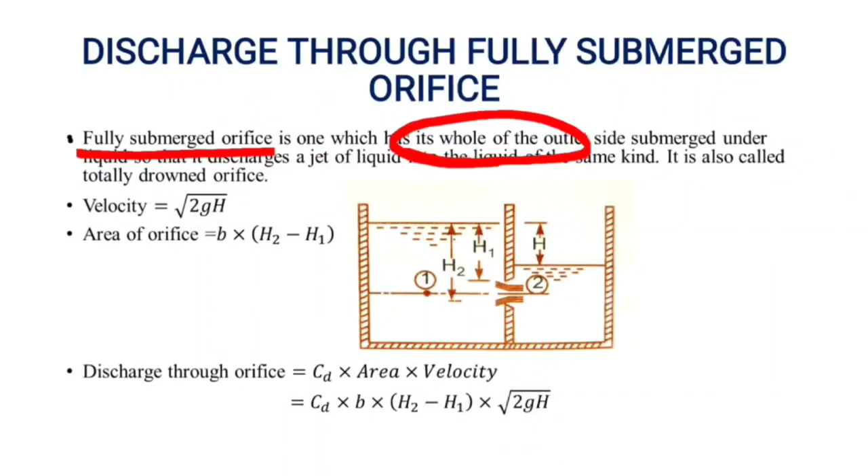Let's see, this is up to the bottom, the height will be h2. From the top of the orifice provided in the side of the tank, it is h1. So the depth we get is h2 minus h1, giving the depth of the orifice.

Multiply by the breadth of the orifice to get the area of the orifice. The general discharge formula is Q equals Cd times area into velocity. Substitute area as b into (h2 minus h1), and velocity as under root of 2gh. This gives the formula for discharge through an orifice when it is fully submerged.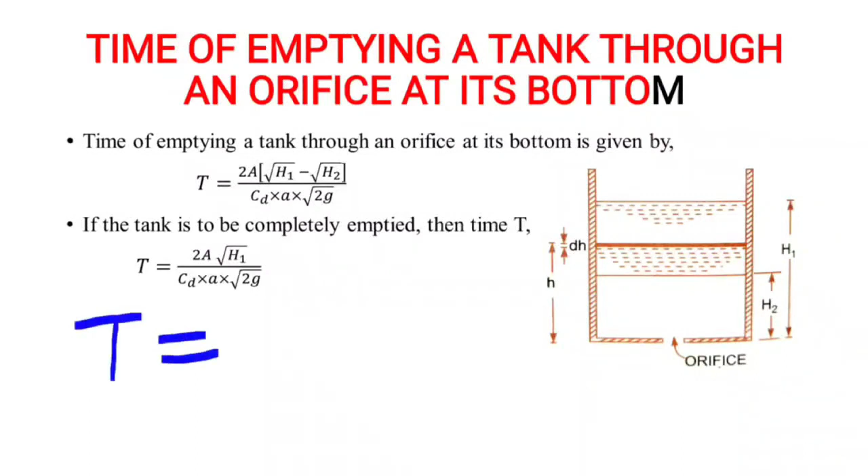CD is the coefficient of discharge. The formula for time of emptying a tank through an orifice at its bottom is given by: Capital T equals 2A times (under root of h1 minus under root of h2), divided by Cd times small a into under root of 2g. This is the formula.

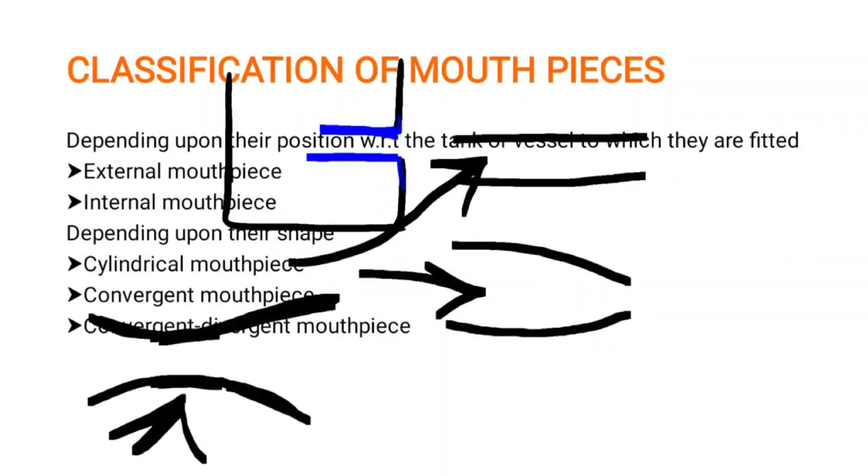The next classification is based on the nature of the discharge at the outlet of the mouthpiece.

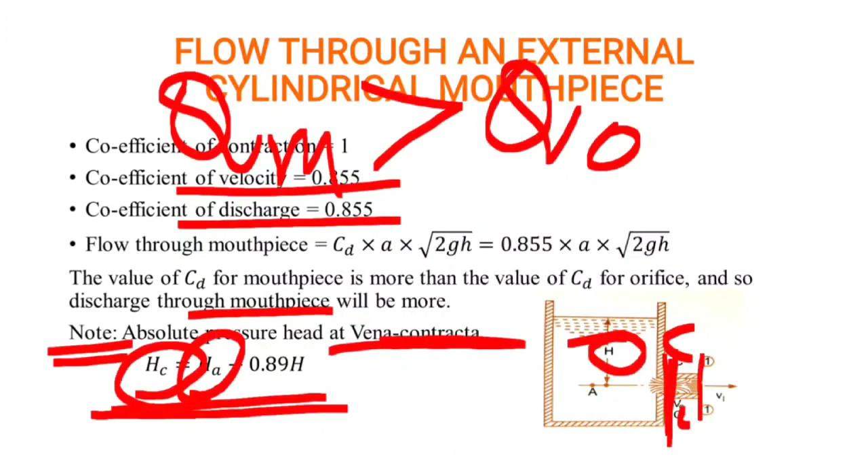The formula is given by HC equals HA minus 0.89 times H. H is this, HA is atmosphere, and HC is at vena contracta, the pressure head. HA is the atmospheric pressure head. In terms of water, we give HA as equals to 10.33 meters of water. We discuss this value in the pressures topic.

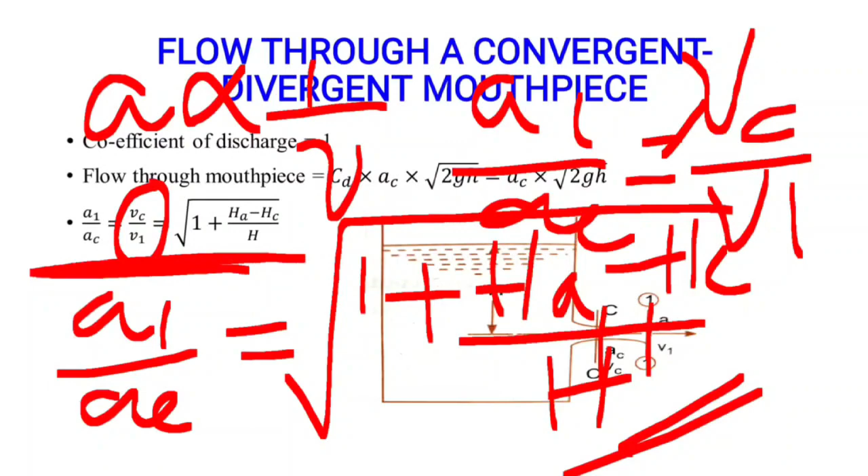The next one is flow through an internal mouthpiece, where the mouthpiece is inside the tank. We have two cases here: running free and running full. This is also called Borda's mouthpiece or re-entrant mouthpiece. The coefficient of contraction will be 0.5 for this case, coefficient of velocity will be 1, and coefficient of discharge will be 0.5. Flow through mouthpieces is CD times A times under root of 2GH; since CD is 0.5, the formula is written as 0.5 times A times under root of 2GH for an internal mouthpiece.

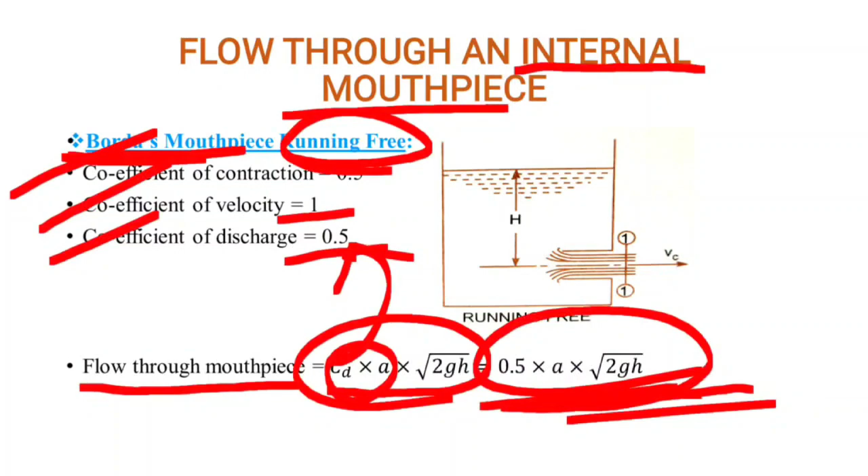The next one is Borda's mouthpiece running full. In the last case it was running free, meaning the liquid does not touch the walls of the mouthpiece. But in this case the liquid touches the walls of the mouthpiece. Here the coefficient of contraction will be 1, coefficient of velocity will be 0.707, and coefficient of discharge will be 0.707. The flow through mouthpiece general formula is CD times A times under root of 2GH; since CD is 0.707, the formula is written as 0.707 times A times under root of 2GH.

Up to this, the flow through orifices and mouthpieces chapter is over. In the next class, we will see previous year questions and some expected questions. I hope this class is helpful to learn the subject very well. In the next class, we see the previous year questions. Thank you.